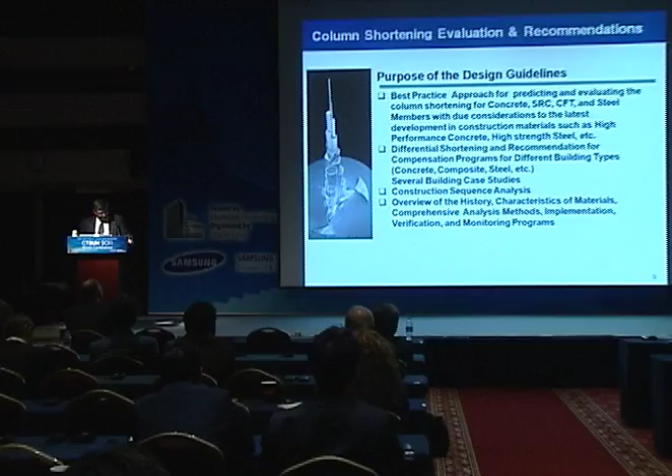At this moment, I thought probably the best thing I can do - obviously I'm the only one, as you can see, there aren't many people - is that we are recruiting people who are trying to contribute to this guideline. And the intent is not to just have a general guideline, but to have really good reference material that people can use in real practice.

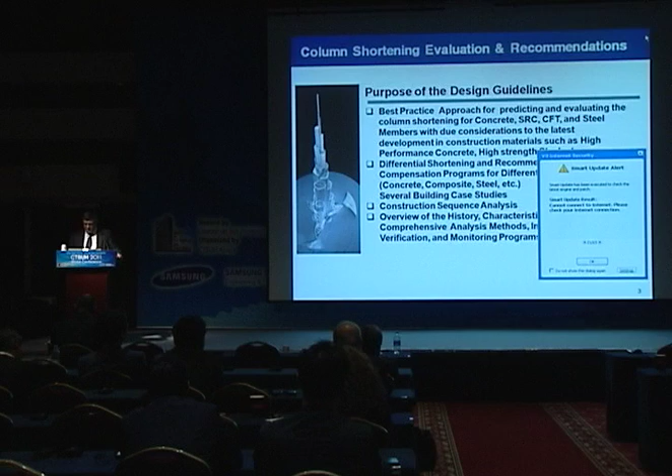So the purpose of the design guideline is to provide a best practice approach for predicting and evaluating column shortening for concrete, steel reinforced concrete columns, CFTs, and steel members, with due consideration to some of the latest technology in materials, such as high-performance concrete, high-strength steel, and ultra-high-strength concrete in particular, which exhibits very low shrinkage, meaning also very low drying creep.

And also to take a look at differential shortening and recommend a compensation program for different types of buildings, whether concrete, steel, or composite. We'll be presenting several case studies related to this, and also talk a little bit about construction sequence analysis.

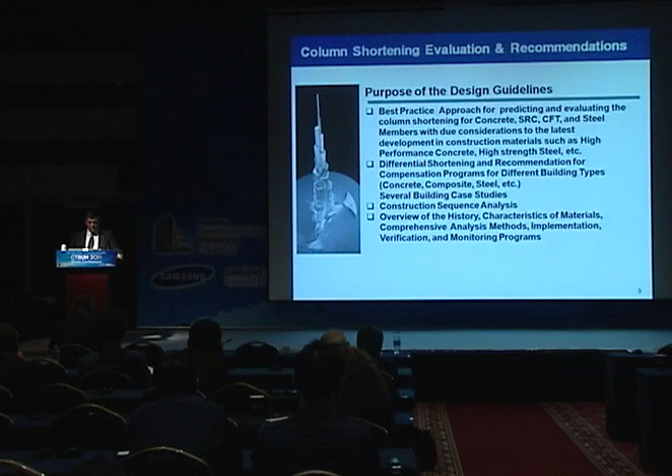Right now, who's responsible for this? Are the designers really responsible for doing construction sequence analysis, or the contractor? A lot of the time, engineers just leave it to the contractor to deal with these issues, and a lot of the time they're going in two different directions, based on real experience.

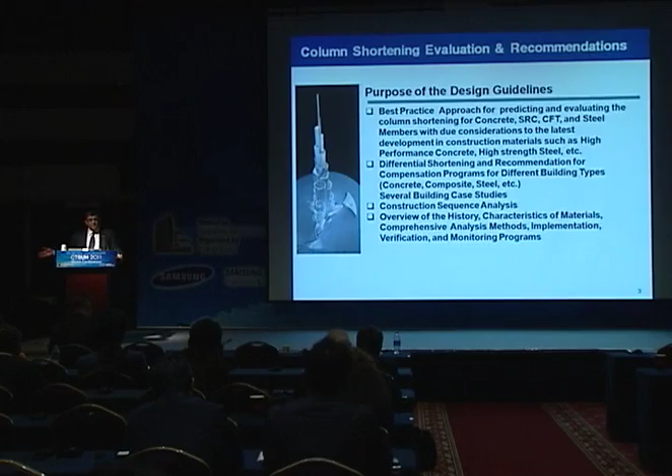At the same time, who's doing it? What kind of program are they using? What kind of available program do we have in the market that can deal with these issues? And are they good enough to deal with that, especially with many of the complex buildings we are seeing today that are made out of concrete?

We also want to provide an overview of the history and characteristics of materials in terms of verification, and show the verification and real-time monitoring program. With that, I would be looking for a lot of database. I have some, and I'm sure many engineers around the world have been collecting some of this data. It would be good to add it to the data bank of information to make sure that whatever we're recommending is practical and correct. Historically, we didn't have a lot of data on this subject, but now we're getting a little bit more.

For example, in a composite building, there are three different things we'll be concerned about: relative shortening between a concrete core and steel column, or a concrete core and a composite column, or a composite column and a steel column, and also looking in detail at what kind of construction program we have and how it relates to the actual construction.

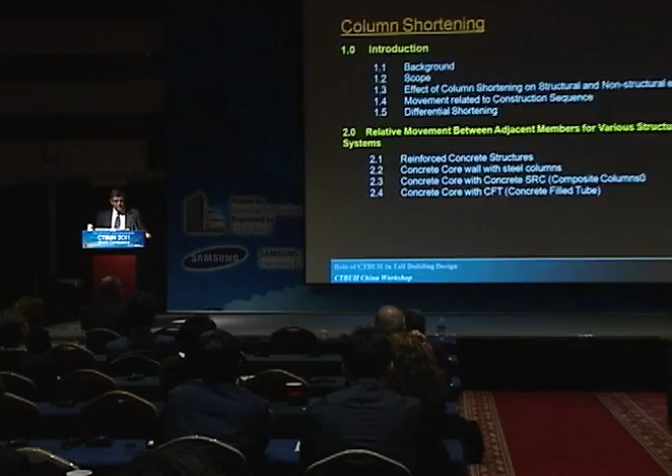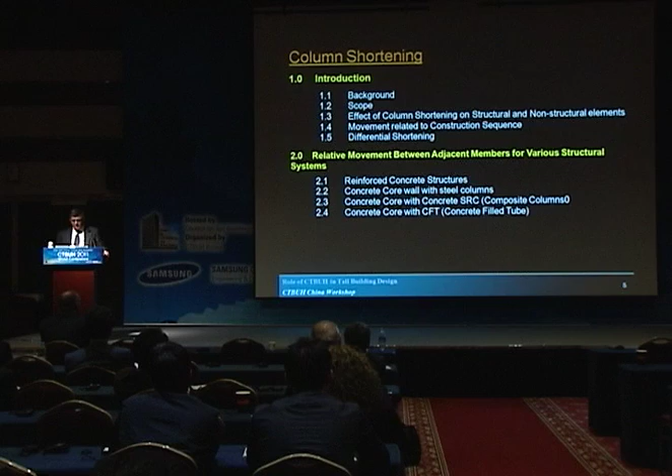So the outline, this is an overall outline, still preliminary and a draft. It will consist of an introduction with background and scope, differential shortening, relative movement between adjacent members, and prediction of elastic, shrinkage, creep, and temperature effects.

There's a literature review of all the different available models, plenty of them - ACI, European code, GL code, Australian code - and also strength development of these with time, and looking at the development of modulus of elasticity versus time for different types of concrete.

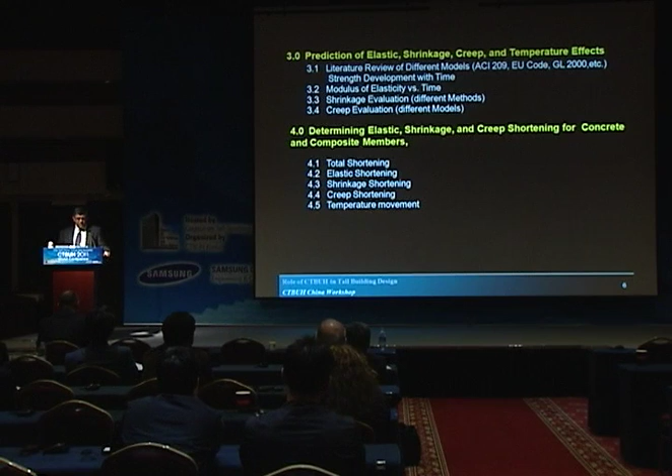There's a lot of data bank on concrete, but when it comes to composite, what is the behavior and what kind of assumptions we make is another challenge we have to look into. Shrinkage evaluation and creep evaluation: determine the elastic, shrinkage, and creep shortening for concrete and composite buildings, looking at total shortening - elastic, shrinkage, creep, temperature - and also construction sequence analysis.

Review all the available software, as I mentioned earlier, and look at case studies. These are preliminary ones that I put together that I know of, but anybody who can contribute more, I'll be happy to receive it - especially with Arup and SOM and any kind of organization internationally, it would be helpful.

Also testing of materials - a lot of the time there aren't many good laboratories that can test for modulus of elasticity and creep coefficients in particular, so they have to be pretty sophisticated with a good control room that can give us reliable results. And the people conducting it are also extremely important from a quality control standpoint.

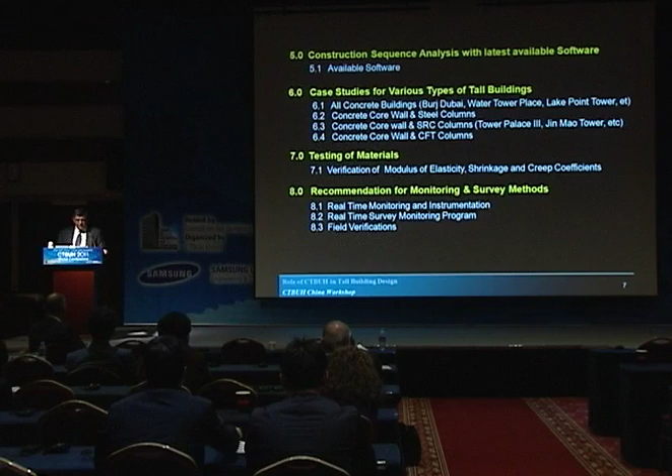Also, for recommendation of monitoring and survey systems in terms of reassuring engineers as they build their buildings, what kind of devices are available that they can use, and recommendations to test the building as they're building it and make adjustments if necessary before the building is completed.

Other issues we'll be dealing with are the effects of differential shortening and restraining members, obviously due to outriggers or floor framings or a very large member restraining other issues, so that's another topic.

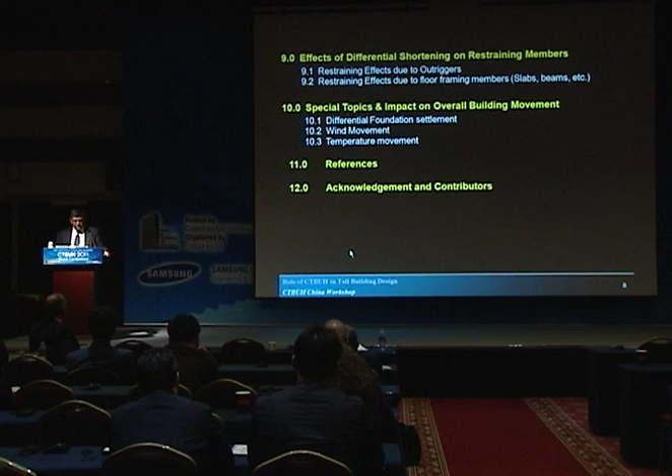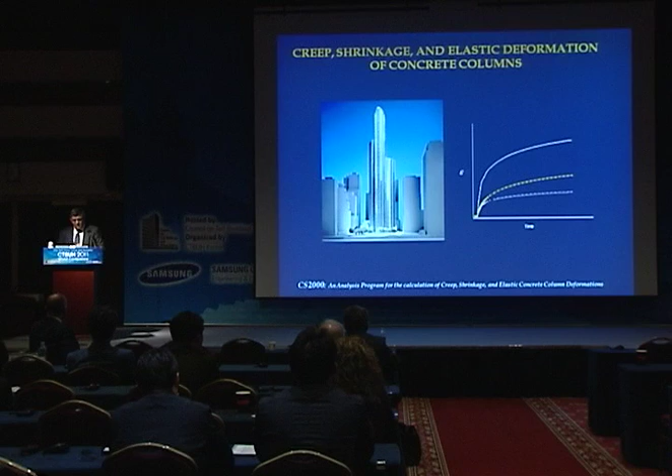Special topic on the impact of overall movement, and we'll provide references and acknowledgements to contributors. This is some of the projects I've done in the past while working with SOM. This is a pretty sophisticated program using the Gardner-Lockman method, the GL2000 model, which has a detailed correction for steel reinforcement and CFTs and so on.

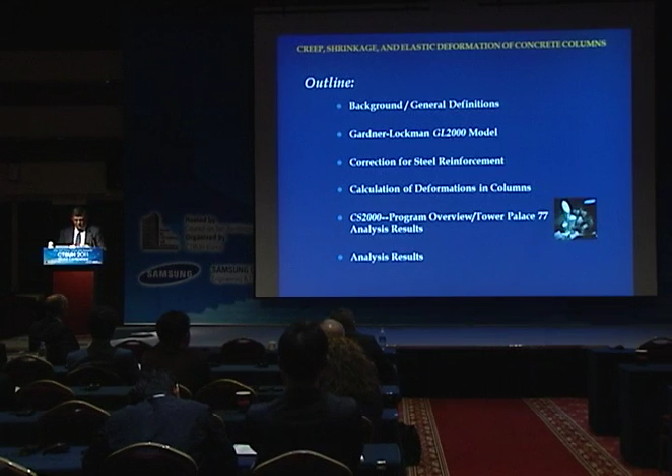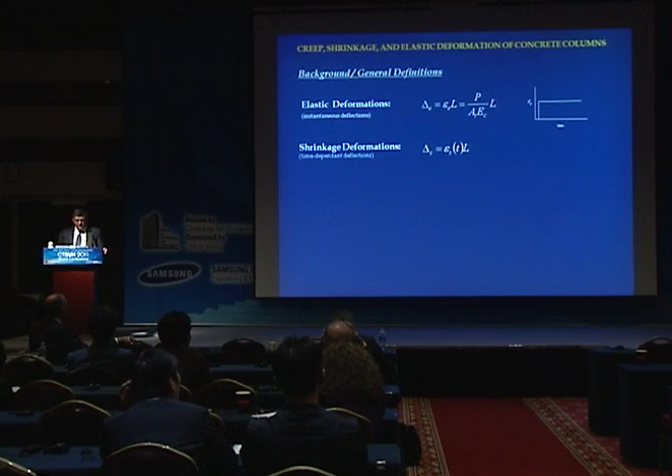We'll go into background on theory, how to evaluate it for both elastic and creep and shrinkage, without going into too much detail. This is slightly different from the previous guidelines provided by Fintel and Ghosh and many others, but now we have ACI and European standards that have different recommendations.

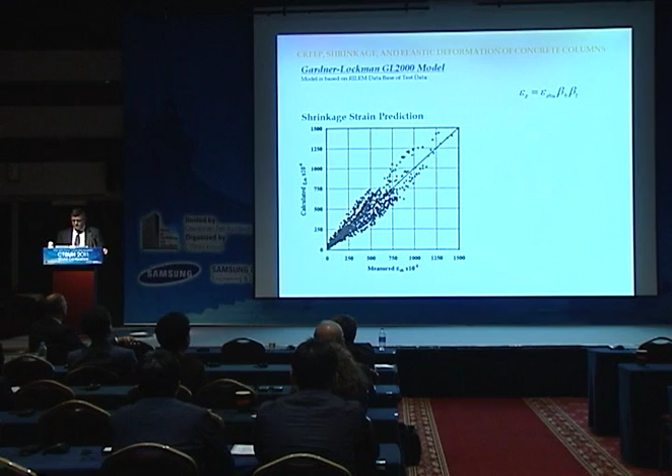Again, I have a lot of information related to a database which was analyzed pretty well, so all of these things, without getting into too much detail, will be included.

Shrinkage strains and compliance. One difference between the old methodology and the new one is how to deal with creep. Previously, we only dealt with the ultimate creep coefficient as one value. Now we're dividing it into two components: basic creep and drying creep. The drying creep is more or less related to shrinkage.

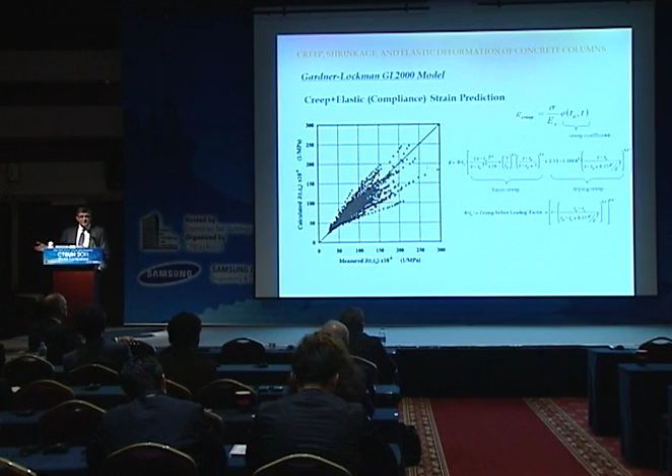For this material with a very low water-cement ratio that goes down to a range of 0.2 to 0.3, that could have a significant effect on our evaluation. The problem is, you can be conservative, but if you are not consistent, it could result in a major problem with the differential shortening.

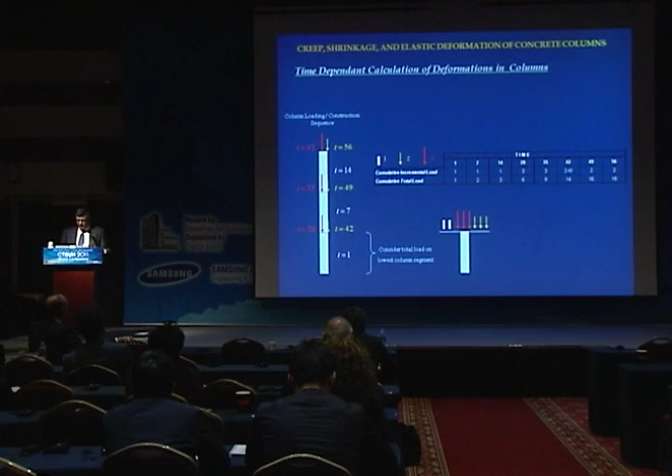Again, these are just theories already developed, which I'll skip through quickly in terms of how to evaluate it, and probably give the formula on how to potentially develop a computer program.

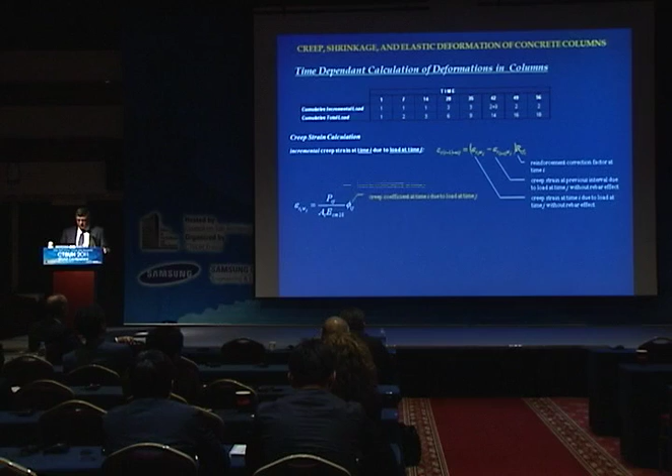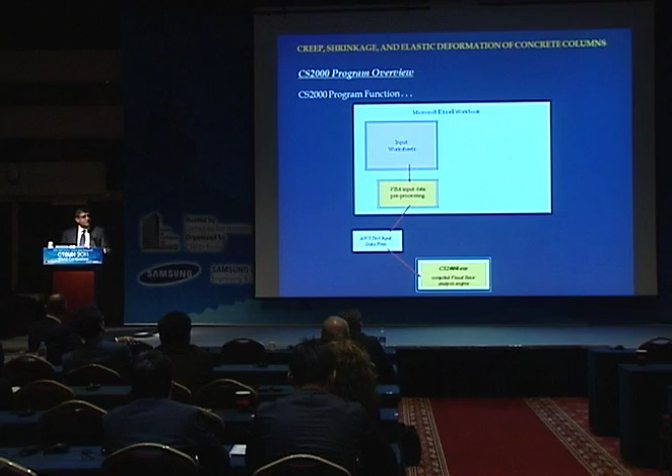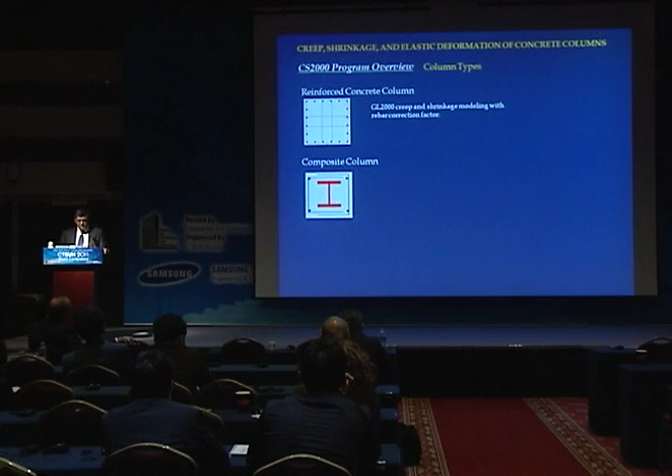This theory is not only applicable to reinforced concrete, but it could be applicable to composite and CFT members, which are not easy to deal with in terms of having enough confidence in the correction program. So again, we can deal with concrete, SRC, and CFT concrete-filled tube columns.

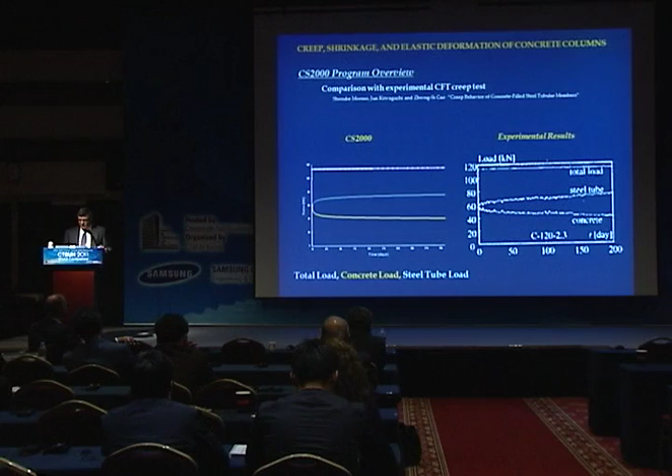With this program, we also tested it. We had some Japanese background data from someone who had done real tests on a CFT, just a small sample. We tested the program to make sure of the accuracy in predicting these strains, and essentially we came very close.

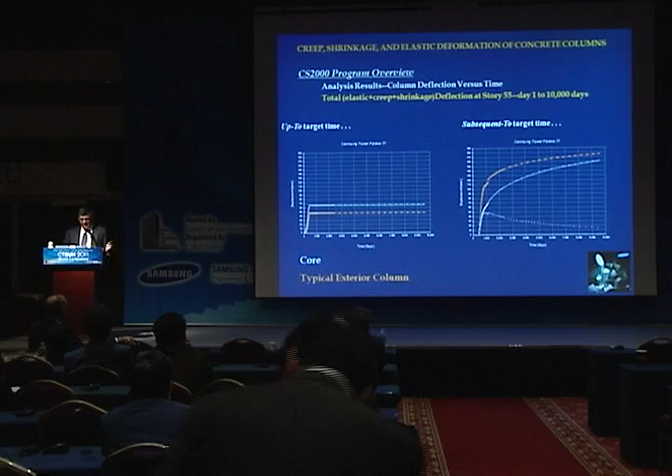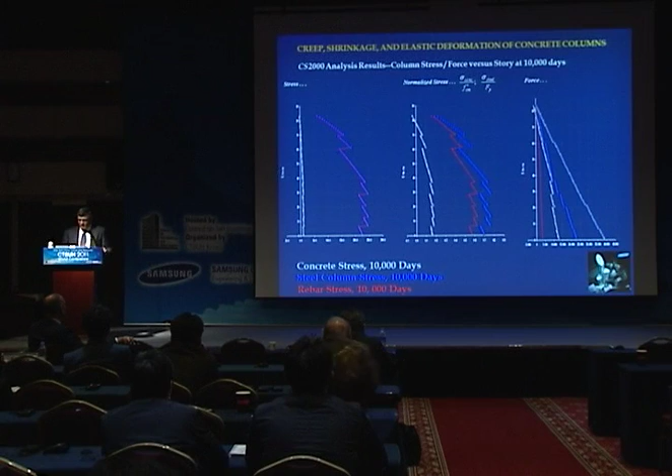Again, to include correction program and guidelines and transfer of forces in real time between steel and concrete. This is practically some of the analysis program I used in Burj Dubai, and it has pretty much demonstrated that it is very, very accurate in predicting building movement.

At the same time, we instrumented several buildings, in Tower Palace 3 here in Korea. At the time I was with SOM, but Samsung was able to support this project and instrument it.

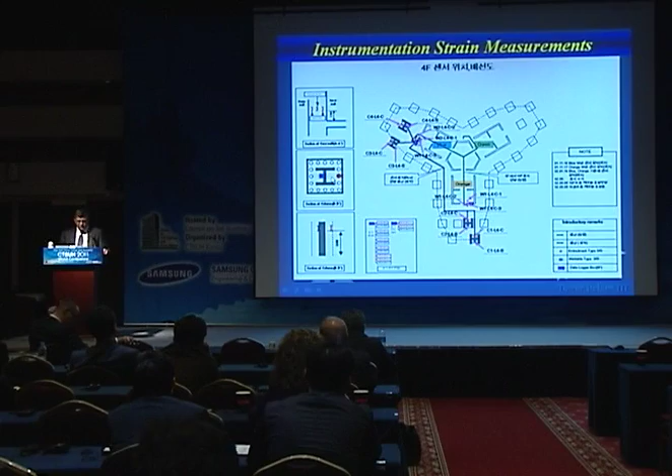With that, we installed strain gauges in the rebar, in the concrete, and also in the structural steel members, including the concrete core. As you can see, there is a pretty good correlation between what we measured, what we predicted—which is right smack in the middle—and what we actually measured between the steel and the concrete.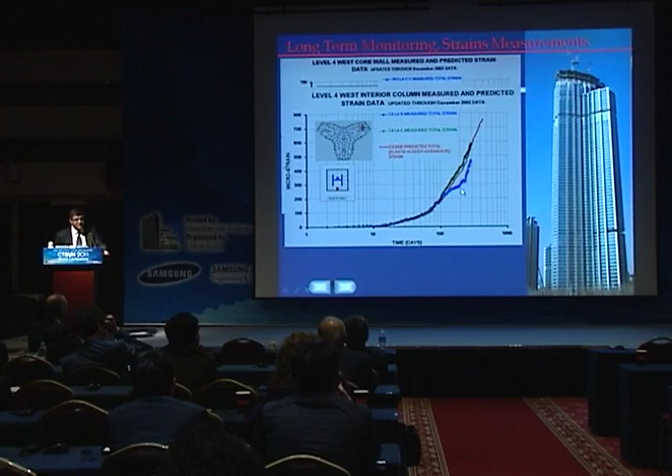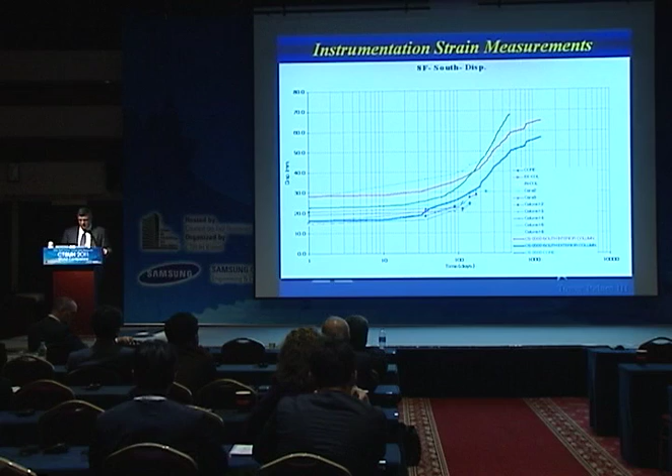So this is as good as it's going to get. This is another column. We also started looking at overall verification of the total shortening in columns at different levels, and our prediction was pretty good.

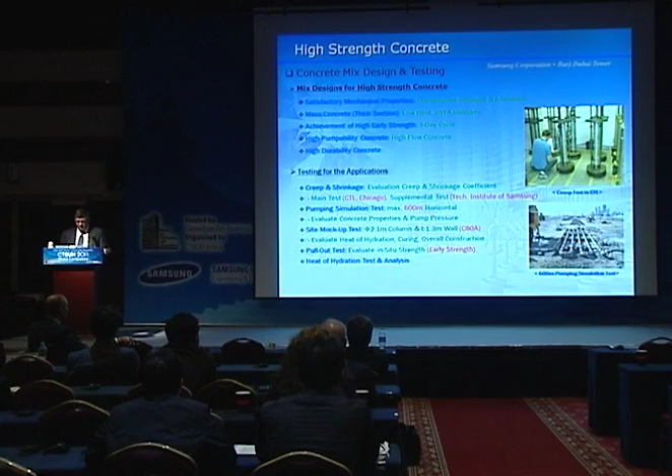As I mentioned earlier, we started looking at concrete material, just as an example with Burj Dubai, where we are really dealing with material of different characteristics than we had previously and historically, and that should be also put on the table.

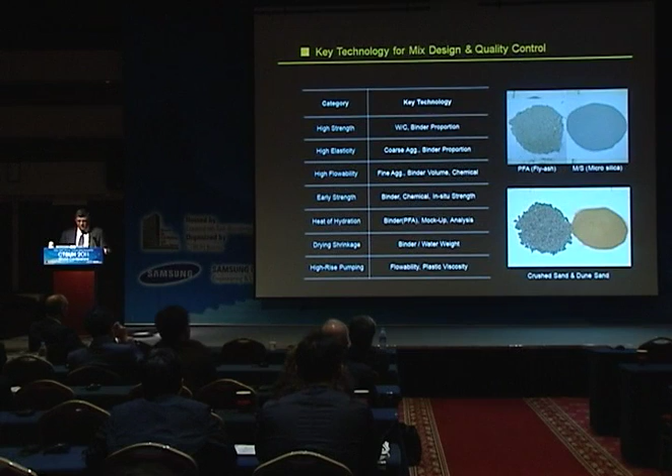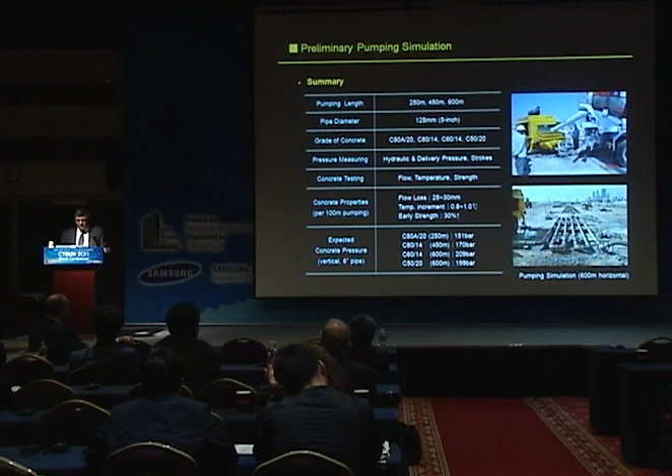And that's about it. Obviously, the ingredient—the concrete—is no longer what we used to have. It's becoming more of a composite material that has to meet a very different kind of requirement than the concrete we used to have. Because of that, we're getting higher quality, very low shrinkage, very high flow, higher stiffness, and so on.

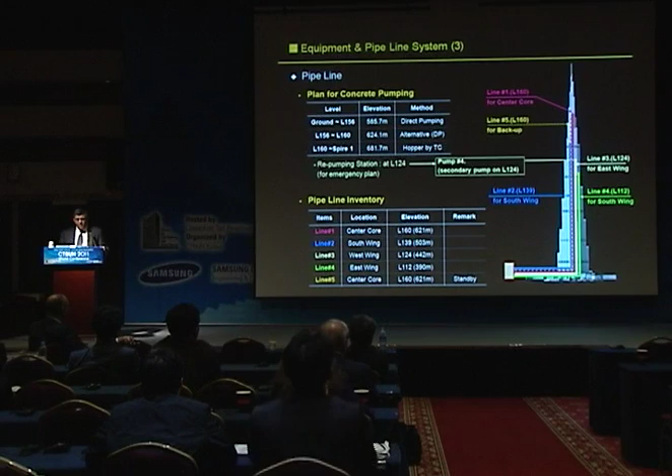We again did a lot of tests. This is the first time I thought about the program and what we can do in order to develop these guidelines, and I hope it would be not just a guideline but also a real good reference for every engineer. We intend to invite a lot of people, both internationally and also part of the Council on Tall Buildings members, and a lot of practicing engineers and code committee members and so on, to contribute to this document. Thank you very much.